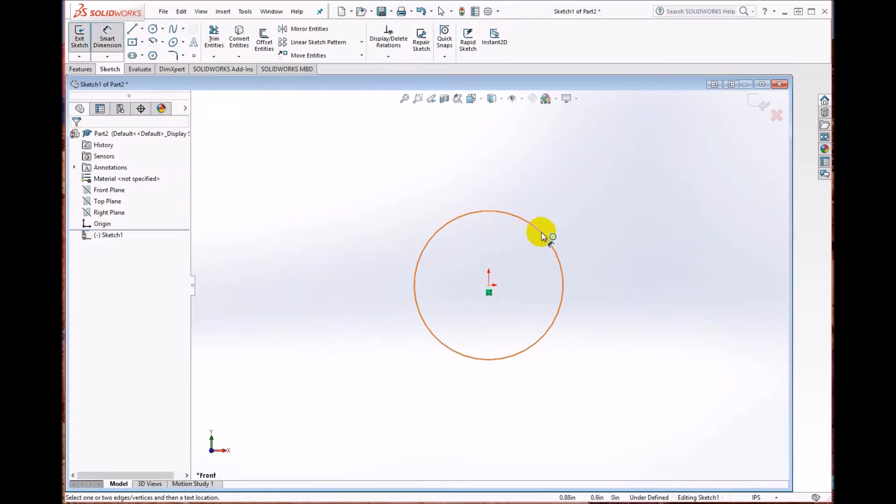Press D, or use whatever accelerator you've got set up. Make it 1/2 inch in diameter. Finish that, and I'll extrude it out to 1 inch. So there we are with the beginning - it's a cylinder, nothing special.

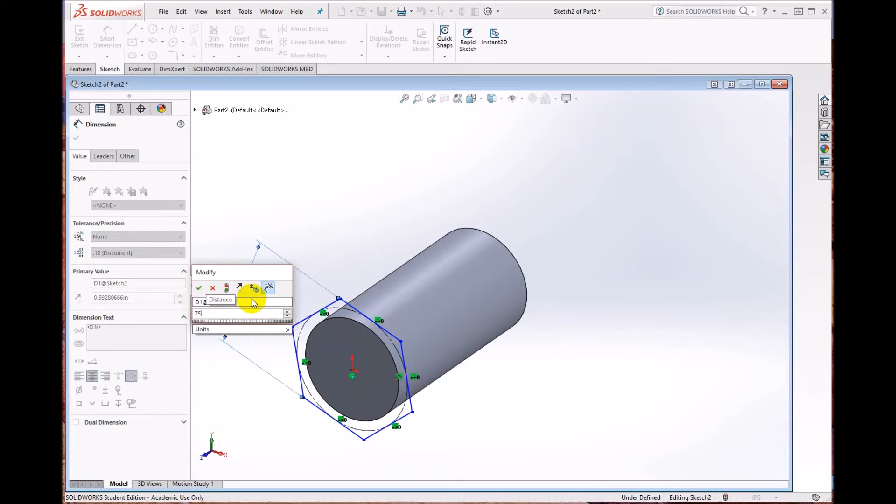Let's put a head on it. I'm going to do another extruded boss base. Click on the top, and here I'm going to apply a hexagon. I'll drag out, and I'm going to dimension this hexagon to be 0.75 across the flats - use whatever number pleases you - and I'll have it extruded by 0.2 inches.

Now what I neglected to do, and this is a good example of how to go back into a sketch - remember, I did not make that hexagon parallel to anything, so I'm going to go back into the sketch. Here's my original sketch. I'm going to take this top surface and make it horizontal. Accept the change, and now I have a part ready to move forward with.

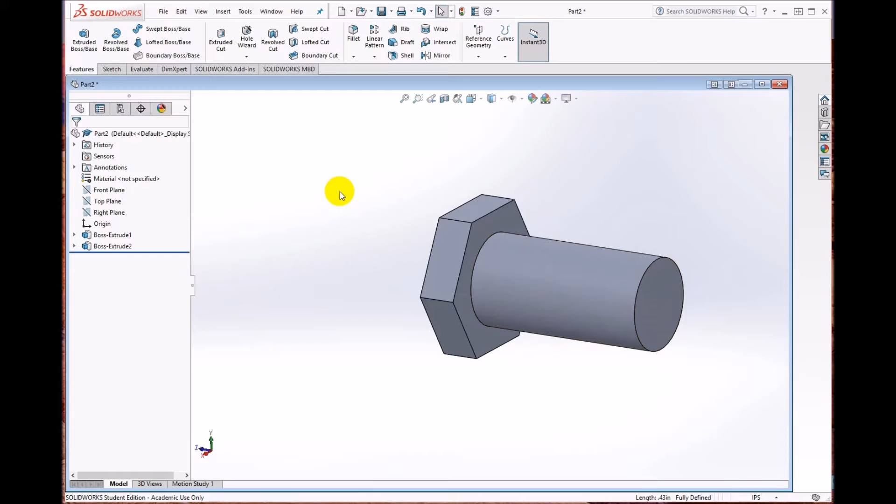My goal is to create a reference plane that is 15 degrees offset, say for example from this flat here. So I'm going to do a feature reference geometry. The first thing I'm going to do is create an axis of the cylindrical part so I can have my plane bisect the cylinder.

Now I'll create a reference plane. It is already aligned with the axis. I'm going to give it a second reference of this top here. Notice it initially has it perpendicular. I'm going to change it to 15 degrees offset.

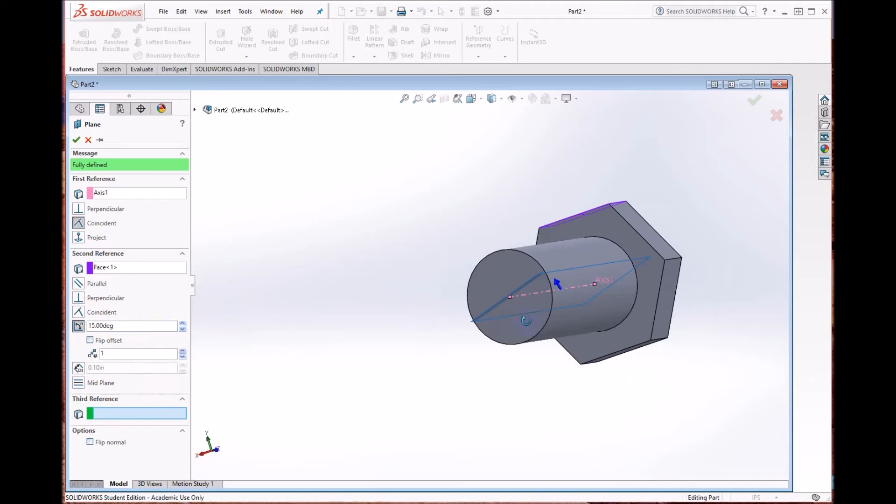If you had like 60 degrees, you'd see that that was different. I'm going to make it 15. Typing in 15 here in the angle field, you'll see that it is in fact 15 degrees offset, and I will accept that. Now we'll go ahead and create an extruded cut based on that plane.

I will draw a circle. Let's change my viewpoint a little bit here. I'll draw a circle. Now I'm intentionally going to make the circle not on top of anything. I'm going to add a relation to it in just a moment. So I've got a circle. I will accept that, and let's go ahead and do that.

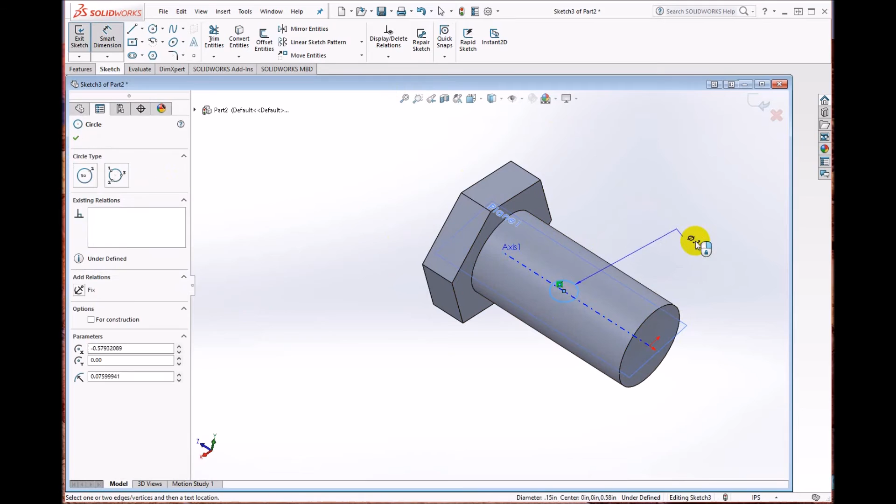Let's add a relation. I'm going to click on the center, shift click on the axis, make them coincident, and now that circle is centered on the axis of the cylinder. I'm going to give it a diameter - again, use what numbers make sense for you - I'm going to make it 0.2 inches in diameter.

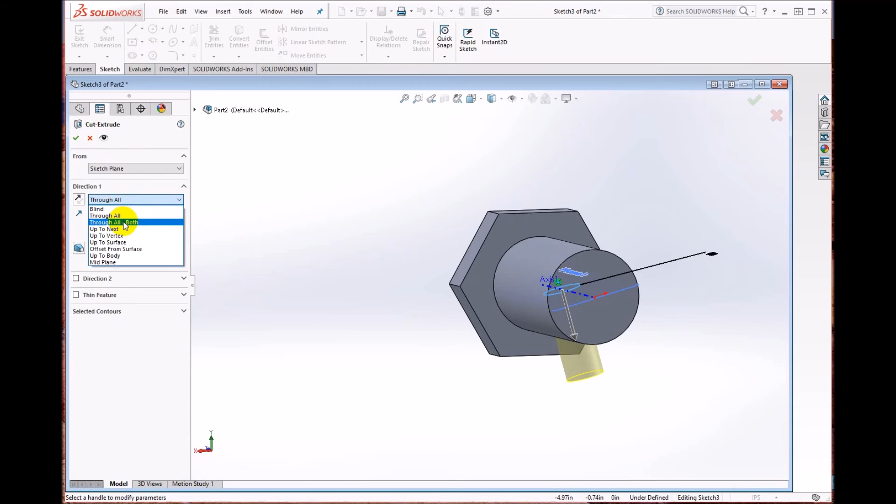I will accept that, and I can extrude now. Right now I'm extruding through all. Notice if I do through all, it goes in one direction or the other. But there's also a choice here - I can go through all both, which makes it go through up and down. That is what I want. So now I've got a hole that's offset 15 degrees from the flat, ready to use in my part, almost.

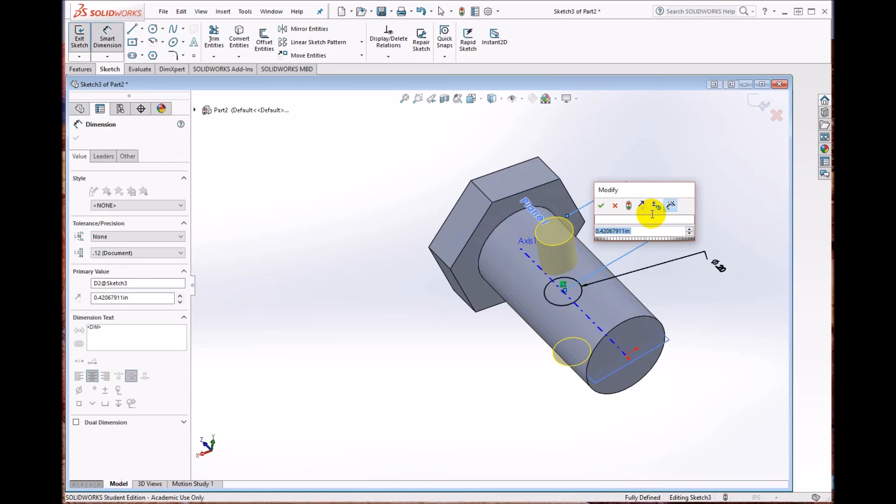Again, I forgot to add a dimension, so I'll go back into this, edit the sketch, and I'm going to add a dimension from this surface here, basically from here to here, of a 1/2 inch, and I will accept the change, and now I have fully dimensioned the part.

That's the end of the video. Hope you enjoy.